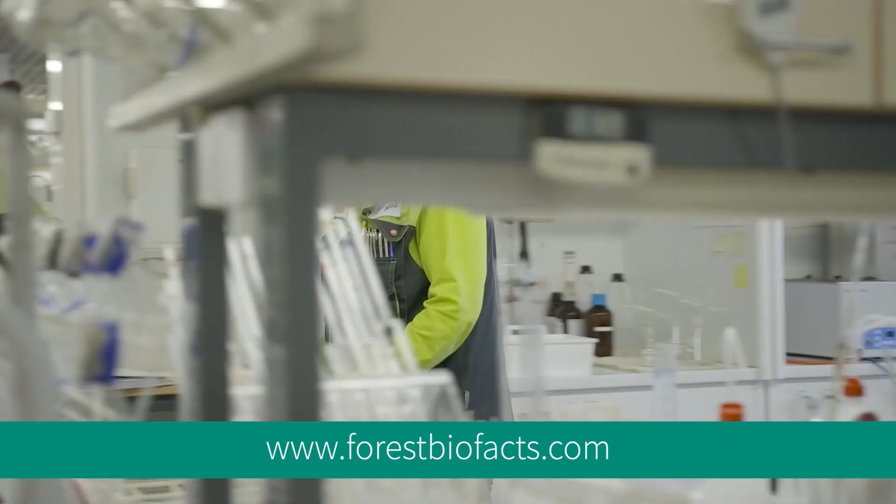The world is digitalizing at an accelerating pace, which creates a need for new learning methods. The forest industry has also experienced significant changes within the last decade. In addition to traditional pulp and paper manufacturing, many new forest-based products and end uses have emerged.

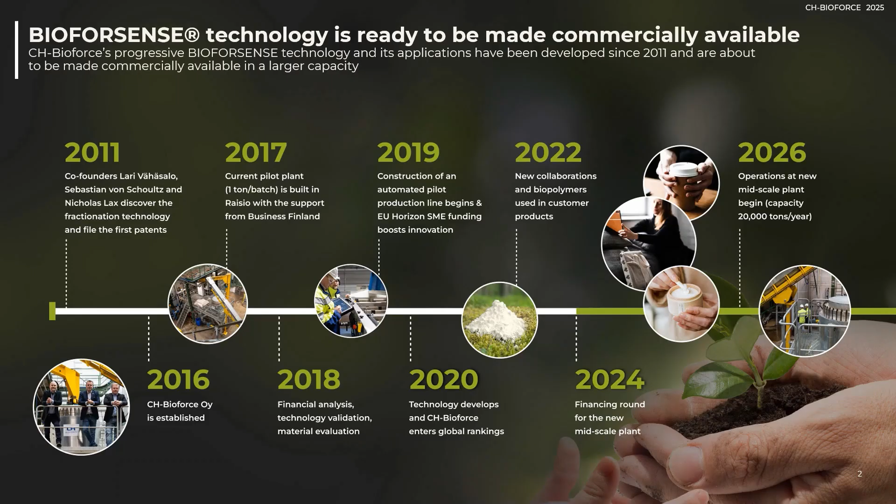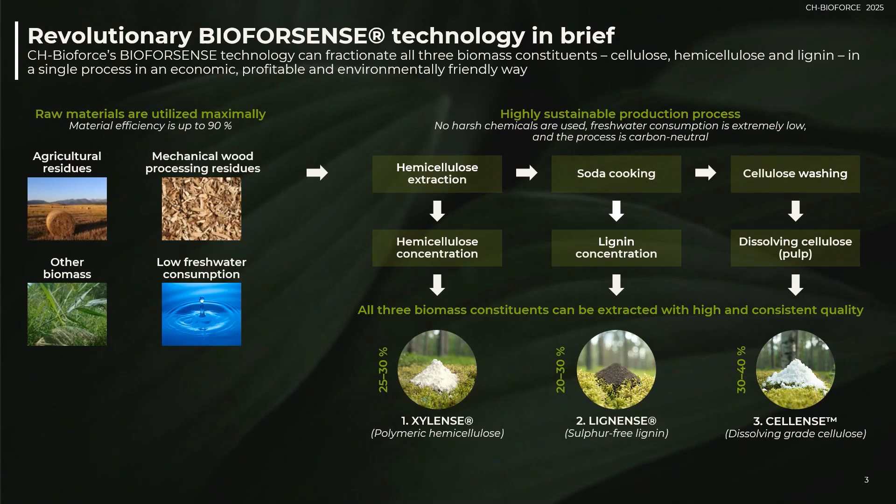What we do really is we extract the hemicelluloses in their polymeric and most natural form, and in pure form with only water. So this is pressurized hot water, which is in a sense not really inventive if you think about the decades before us, but the methodology in itself has quite many implications for the product quality. But what we are certainly most interested in is the sulfur-free lignin because of its highly efficient product qualities.

If we look at the lignin, we have actually deemed it a product name called LIGNENSE, a registered trademark. What we are interested in most applications is its true ability to give some added value for many products. It's a UV blocker, antioxidant, and antimicrobial agent, and especially in cosmetics and food packaging this has caused a lot of interest for shelf life applications.

However, when we go to coating and making barriers that contain lignin-containing properties and these effects that we want, we need to understand how LIGNENSE or our lignin affect the barrier formulations, and how they will apply in real life applications. This is really where we ended up combining our efforts with ACA Systems to look at how coating applications and formulations end up behaving in real life applications. Of course, lignin can also be turned into lignin resins like lignin phenol resins and other applications, but we are really looking at these special properties that we find in this sulfur-free lignin that we can produce.

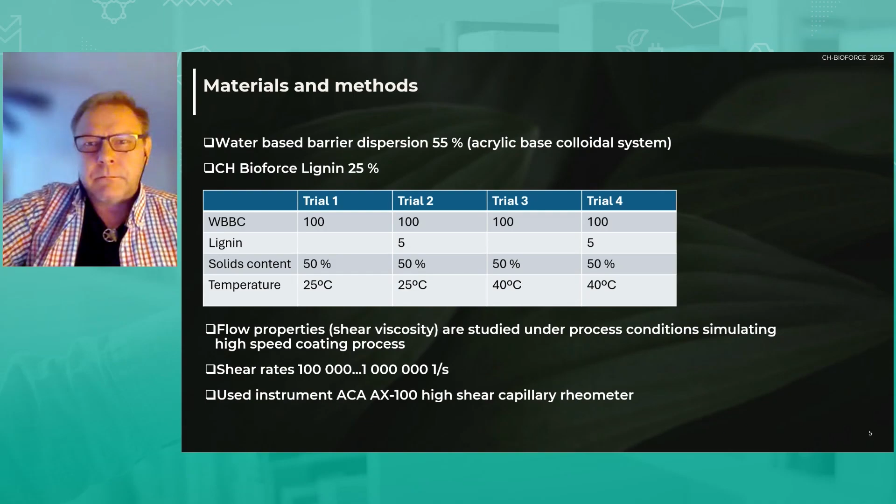We start with materials and methods, so we wanted to keep this very simple for having a short overview of what we have done. We had a water-based barrier dispersion as a base material. This was a commercial acrylic-based colloidal system. And then we used the CH Bioforce lignin, and we formulated 4 recipes.

We just added 5 parts of lignin to 100 parts of barrier, and made it up at 2 different temperatures just to check the temperature effect on viscosity properties, and solids content was kept constant. So basically, we just wanted to understand how this lignin will affect the water-based barrier dispersion.

When it comes to viscosity measurement, we wanted to understand process-related rheology and viscosity. This is where we are specialized. We are measuring different formulations in high shear conditions that are present in high-speed coating processes. So we want to simulate and create a similar kind of stress that you have in real processes, and use flow channels that are simulating the process effects.

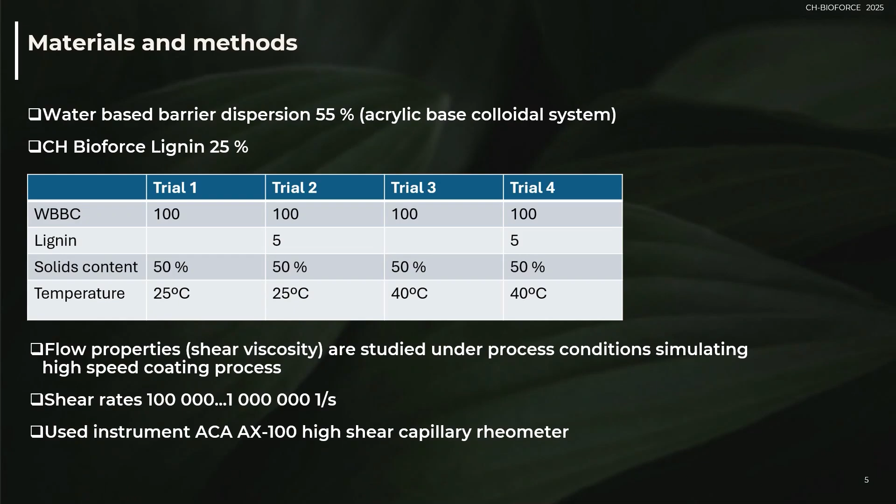And we used this instrument from ACA, AX-100 high shear capillary rheometer, and that's the basic setup for the trial.

A few words about the instrument. As I said, we are specialized in process rheology, and we try to understand behavior of different materials in process conditions. How we can do it? We have developed this new capillary viscometer or rheometer, and we are pressurizing the sample with the high pressure method up to 150 bars, and then we are forcing the liquid or coating color through a narrow capillary.

In high pressure measurements, we use a 0.5 by 50 millimeter capillary, and we can reach shear rates from 200,000 to 1 million roughly. This is very relevant for blade coating and film pre-metering. Those metering elements have a very narrow gap for coating color to flow at very high speed, so there we have extremely high shear rates, and this is responsible for coat weight control, for example. And we have a TAPPI method for that.

Then we can also measure low pressure. We reduce the pressure and use a little bit wider capillary, resulting in a shear rate range of 10,000 to 200,000 roughly. This is more relevant for sizing and film coating.

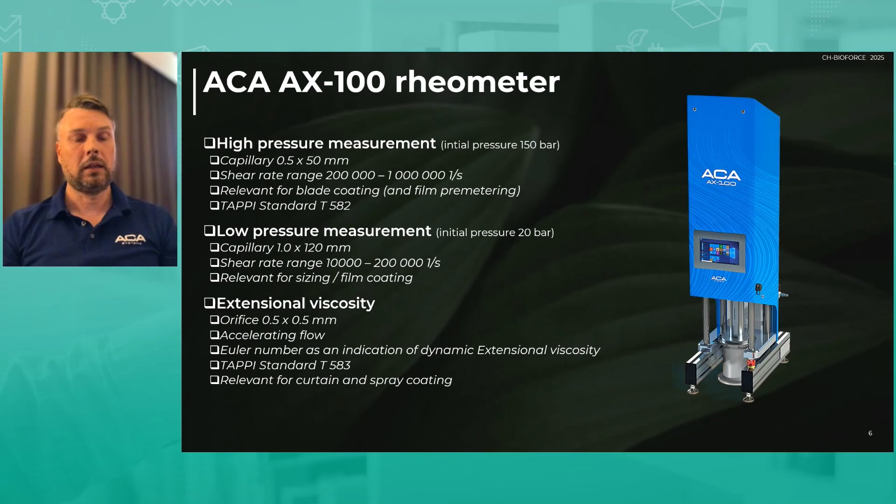And finally, we can also select the orifice method, which is nothing else than a very short capillary. With that geometry, we can create accelerating flow, and we can calculate dynamic extensional viscosity. This is also a TAPPI standard, and you can learn more about these methods from there. This is very relevant for curtain and spray coating, where you have accelerating flow in the process.

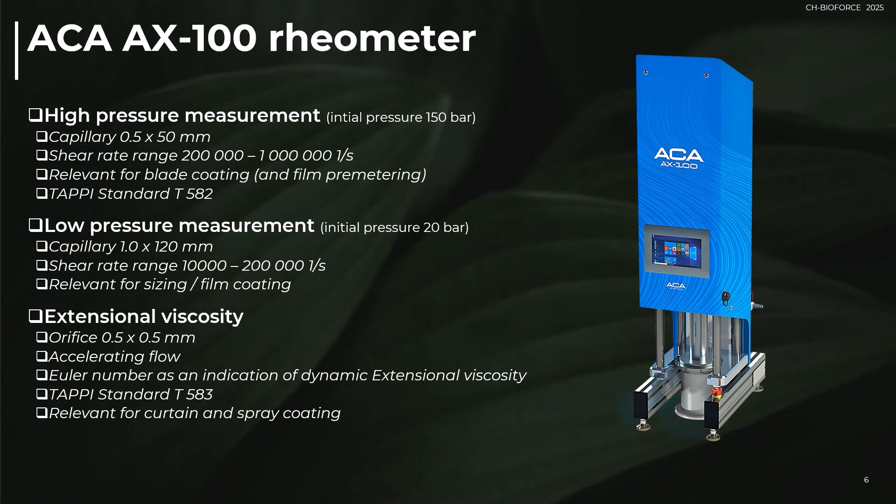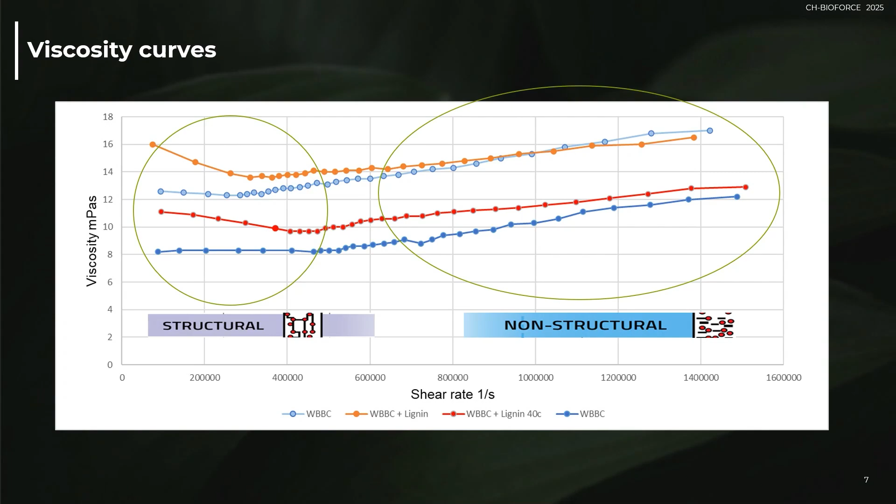Then in high shear area, we are destroying these kind of crystals or structures that are formed by lignin, and we are having a dilatant curve, meaning shear thickening curve. This is quite typical for colloidal systems where we have a very narrow particle size distribution, and this contributes a shear thickening behavior, which is not very optimal for runnability in high speed coating.

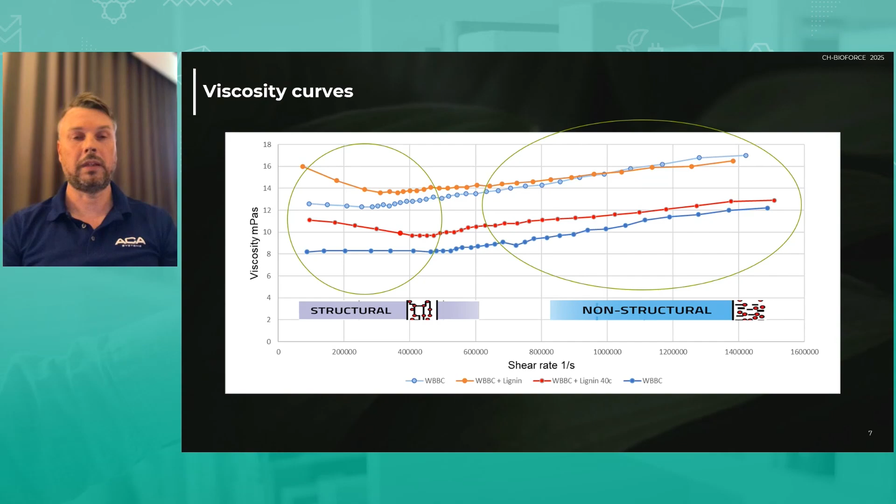But we see that actually lignin is reducing this dilatancy in high shear area. So it is affecting things in a way, first to have a higher viscosity in low or mid shear area, but then reducing the high shear viscosity.

And we are now entering into conclusions. We can say that at low shears, the lignin slightly increased the viscosity, and the viscosity curve is pseudoplastic, so shear thinning, and this is likely due to chemical interaction and structural network formation within the dispersion.

Whereas at high shear rates, the lignin reduced the dilatancy, indicating a kind of friction dampening effect between the colloidal particles. I think this is a very interesting finding, seeing such a dual effect, a combination of pseudoplasticity at low shear and reduced dilatancy at high shear.

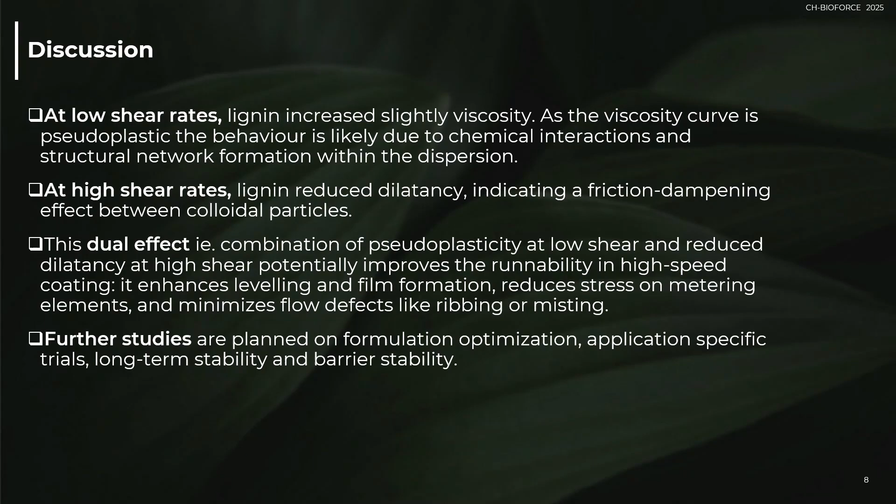It potentially improves the runnability in high-speed coating. Based on our experiences, it enhances the leveling and film formation if we have a shear thinning behavior at low and mid shear, but also when we have a reduced high shear viscosity, we reduce the stress on metering elements and minimize flow defects like ribbing and misting.

This in general is responsible for coat weight control and for barrier coating. It's quite important to control the coat weight properly to get good profiles and good film forming. Of course, there are a lot of studies to be done in the future, and we plan together with Bioforce to do more studies on formulation optimization, application-specific trials, and stability issues for long-term stability and barrier stability.

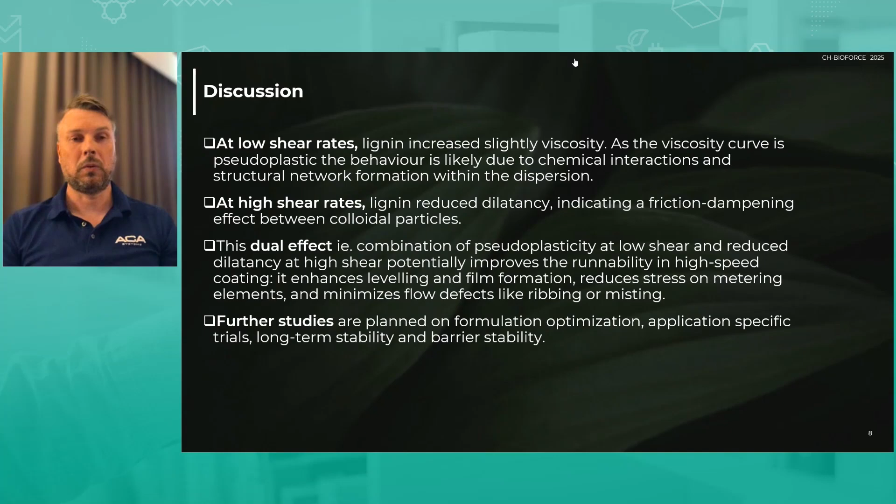But for this short study, we see already quite interesting effects of lignin as a coating additive, and with that I think we are ending this presentation and ready for your questions. Thank you.

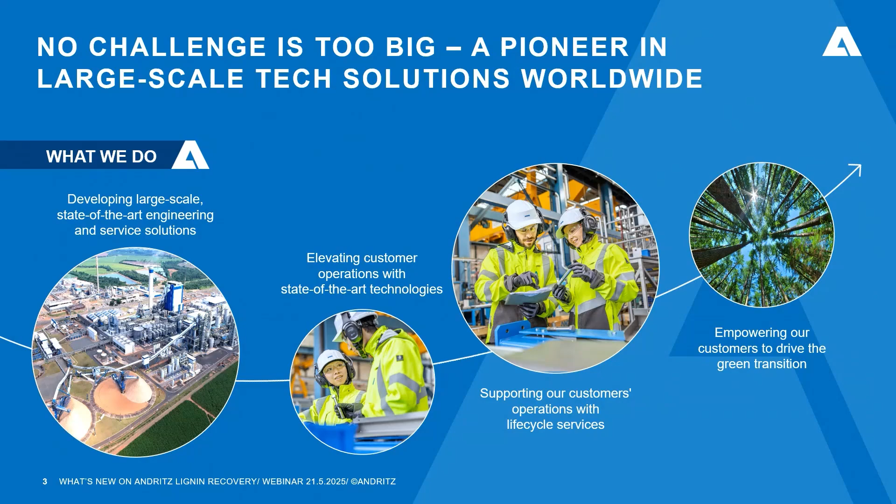Very shortly about Andritz: we are a multi-divisional company working globally in four different business areas: pulp and paper, metals, hydropower, and environment and energy. We develop large-scale, state-of-the-art engineering and service solutions, as well as technologies. We support our customers' operations with lifecycle services, and today more and more we are empowering our customers to drive the green transition with e-fuels, carbon capture, and hydrogen, for example.

For the last 10 years or more, on the pulp and paper side, we have been looking at how we can, together with our customers, unlock the hidden values in their side streams, accelerating green technology development and creating new revenue streams. This has been done by looking at how we can reduce consumption of water, energy, and chemicals at the pulp mills, how we can reuse side streams as new resources inside the mill - a good example being a sulfuric acid plant - and how we can refine side streams to create new value-added products, with biomethanol and lignin being good examples of that development.

When we go to the recovery area, where lignin is quite an important part, we have been providing new products to the market. One is our Kraftanol product, where we purify raw methanol to commercial quality biomethanol. Then our SulfoLoop product, where we produce commercial quality concentrated sulfuric acid out of CNCG. Today, under SulfoLoop, we also have other means of helping to solve the sodium-sulfur balance.

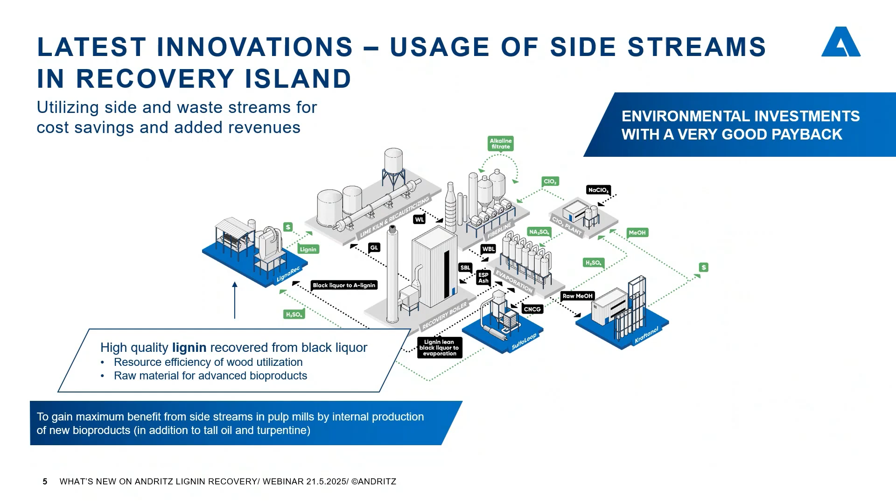And last but not least is of course our lignin recovery product. The driver for lignin, as I see it, is mainly the resource efficiency of wood - how we can take more out of the wood coming in, not burning it, but making new advanced bioproducts, mainly those which can replace fossil materials to reduce the carbon footprint or lack of resources.

At Andritz, under lignin recovery, we have two products. LignaRec is what we call a purified or standard lignin product, where lignin is first recovered from the black liquor, and then in the second stage it is purified with acid washing. The end product is a bulk raw material, which is then further refined for different applications. This is a technology we are also providing to the Södra Cell Mönsterås project.

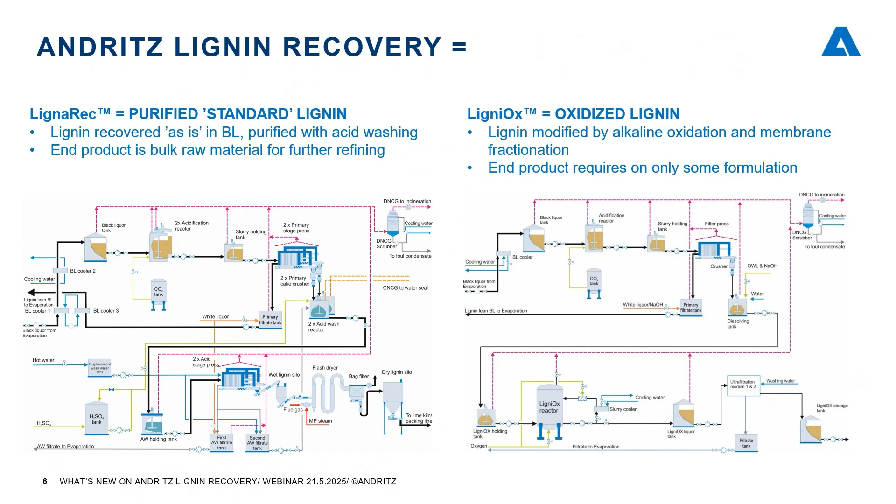LigniOx is an alkali oxidation process for lignin solubilization. LigniOx was actually invented by VTT, the Governmental Research Centre of Finland, and the process was further developed in an EU LigniOx project by a consortium of biorefineries, technology providers, chemical industry players, and research institutes like VTT. VTT is the patent owner for the application use, and there's a shared patent for integration of the LigniOx process into the kraft pulp mill, held by Metsä, Andritz, and VTT.

The process is slightly different. It has precipitation of lignin with the help of CO2, same as in the traditional standard LignaRec process. But then we have oxidation and membrane filtration processes afterwards, and the final concentrate is ready for end-use applications, or only some small formulation is needed. The concentrate can be dried if needed, for easier transportation.

After the EU project, Metsä, together with Andritz and Dow Industries, continued development. Last year, Metsä made an investment decision for a demo plant for LigniOx, and the demo plant is now actually in the construction phase, and will be started up at the end of this year. Andritz is a technology provider for that demo plant.

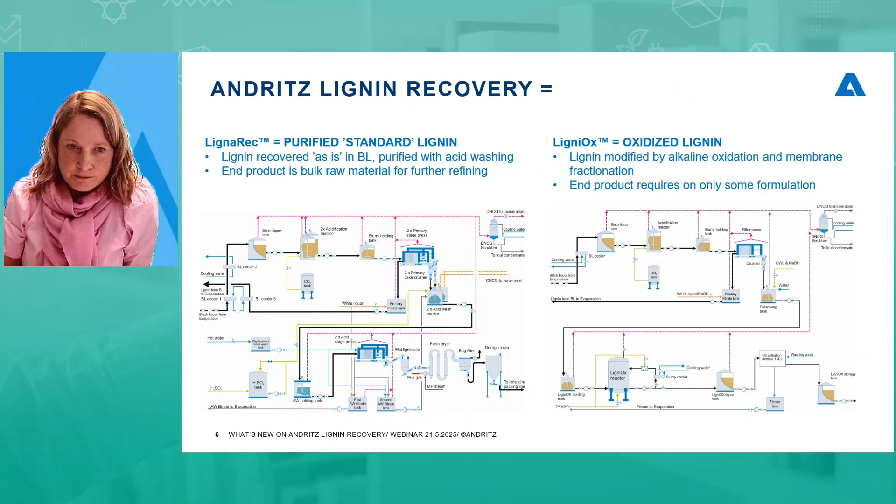A couple of words about lignin products: the development on the product side has been quite intensive, with a lot of different product possibilities, and I think the development is still ongoing. There are already some applications on the market, like phenolic resins, but maybe the lack of production of lignin has been hindering the development further, and we are very happy that the Södra plant will be delivering rather big amounts of material to the markets.

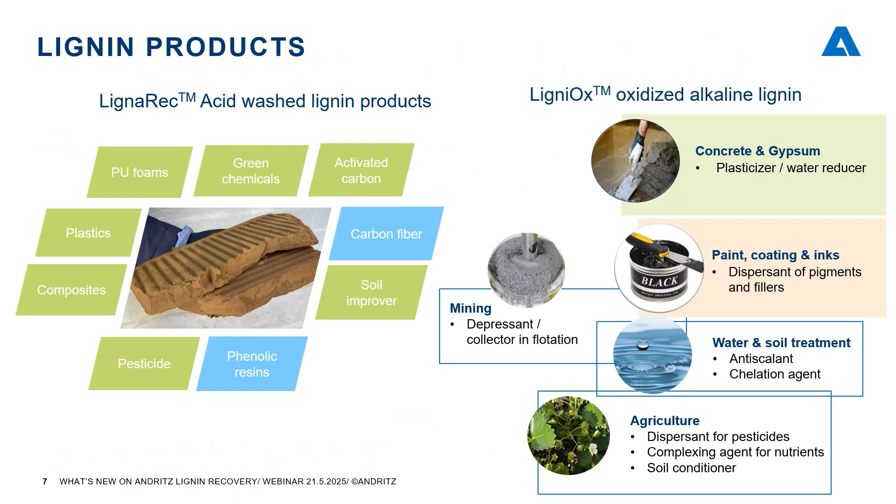LigniOx, the oxidized alkaline lignin, has somewhat different applications. In the EU project, the LigniOx product was tested in concrete and gypsum as a plasticizer, with very good results.

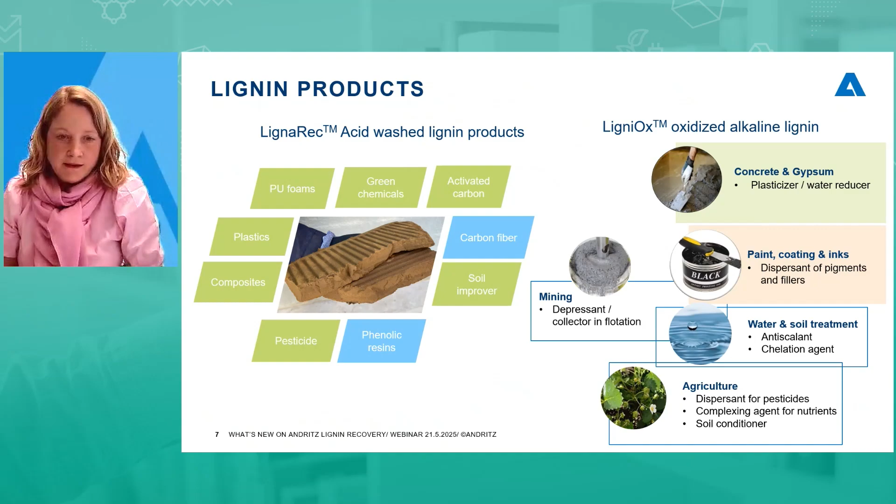Shortly about the process itself, the LignaRec process: we are removing black liquor from the evaporation plant, and we have a precipitation of lignin with the help of CO2. Then the precipitated lignin is recovered in a filter press, where the cake is further dispersed in an acidic filtrate, and the pH is dropped with the help of sulfuric acid.

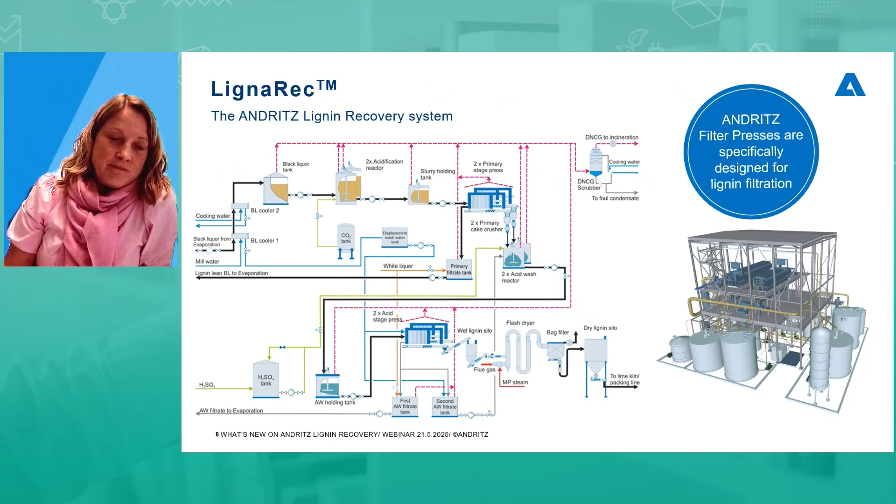The lean black liquor from the filter press is fed back to the evaporation plant. The acidified slurry is then filtered and washed so that we can remove impurities like sodium, and the material can be dried. In most cases it is easier to transport when it is dried, and there we have a flash dryer technology, and then the lignin can be further modified or densified, or whatever is the needed way for the customer.

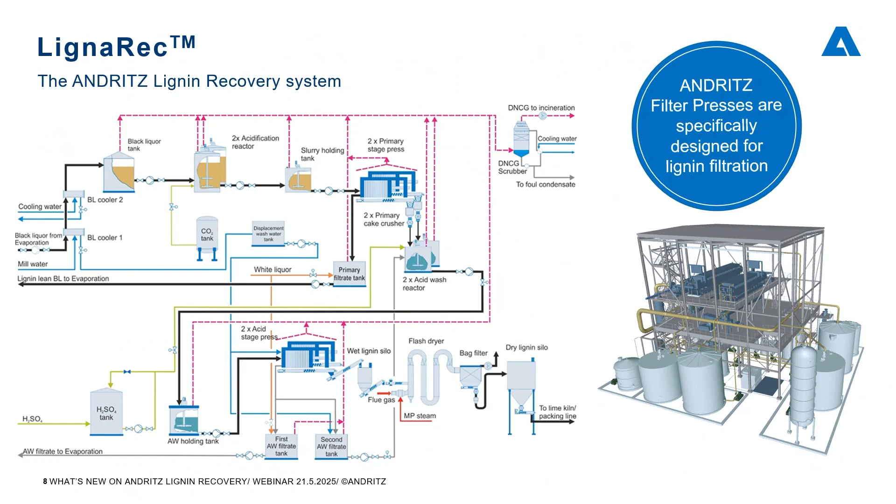The main component of the LignaRec process is the filter presses. We have our own filter press technology in Andritz, and a lot of references from different industries and different applications, but now also for lignin. When we are talking about lignin recovery, it's of course what I just showed you, filter press technology, and then we have a dryer. In most cases, because of the rather high explosive characteristics of the kraft acidic lignin, acid purified lignin, some kind of densification method is good for helping to transport it safely.

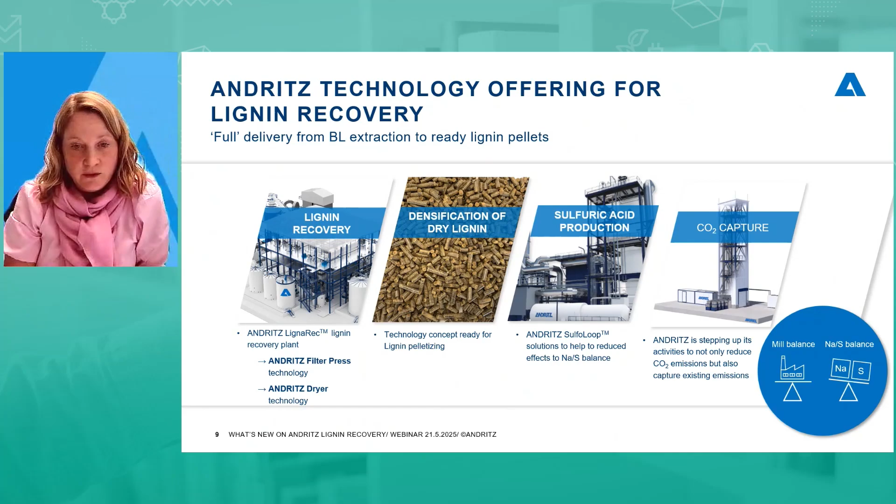As mentioned, we are utilizing sulfuric acid in the process for removing the sodium. So in most cases, when we are talking about lignin recovery, we also consider SulfoLoop solutions to help reduce the effects on the sodium and sulfur balance of the mill. And CO2 capture is today more and more important. We have our own CO2 technologies, amine scrubber and membrane technologies, today very often discussed when talking about lignin recovery. We can extract the CO2 from the lime kiln or recovery boiler flue gases and utilize that in lignin recovery, which would be quite an interesting way.

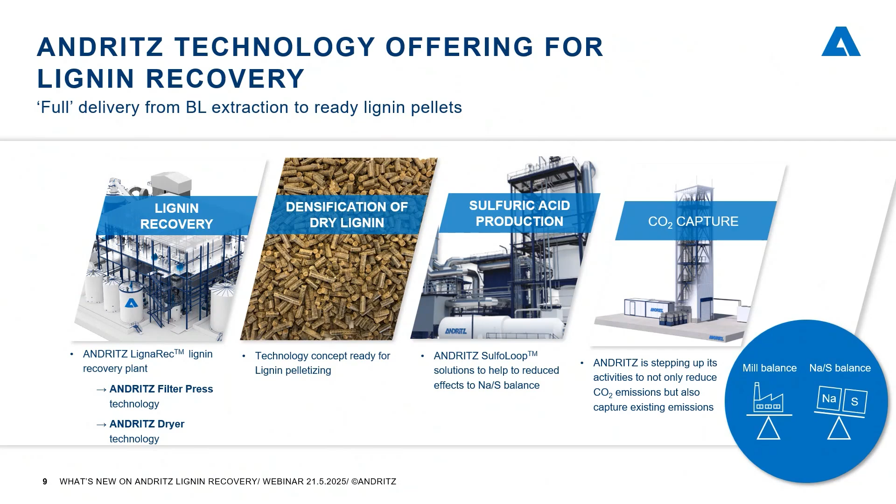When talking about integrating lignin, mill balance effects to the evaporator and recovery boiler of course need to be investigated, as well as sodium sulfur balance. LigniDry is our lignin drying technology, a flash drying technology. Again, very much used already in the industry, but now also utilized for lignin applications.

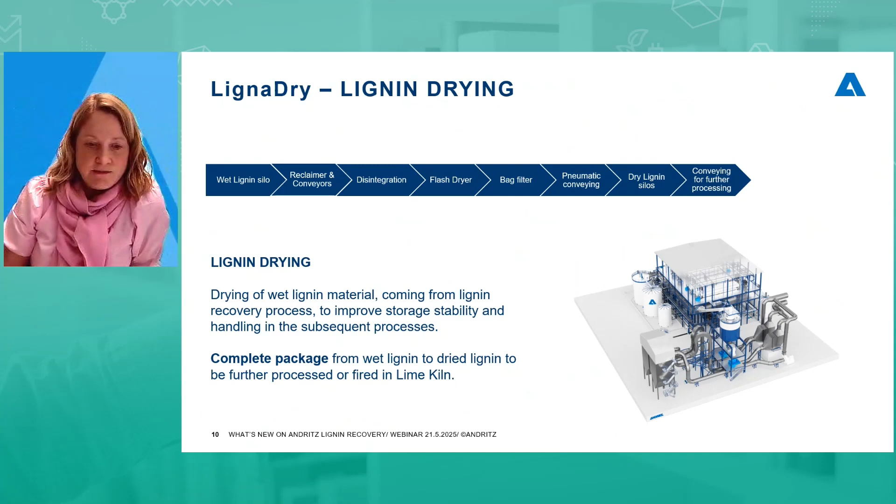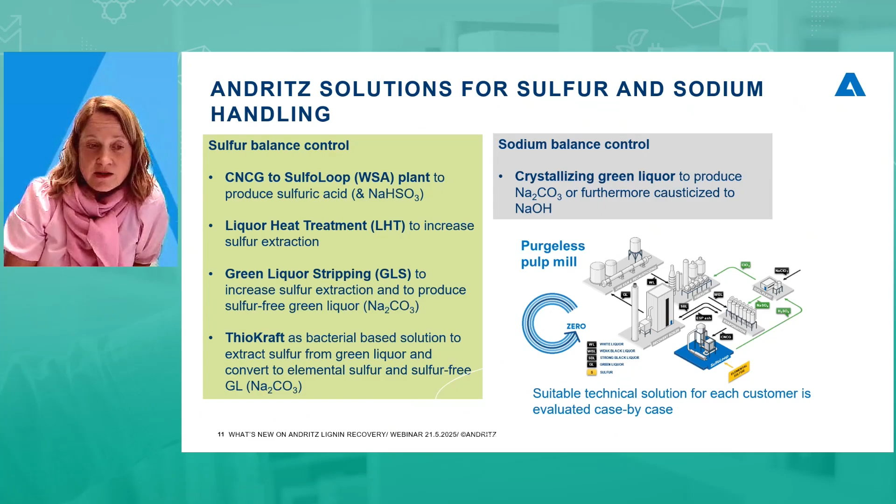For sulfur and sodium handling, for the sulfur balance control, there are different means. The WSA plant, which will also be installed in Södra Cell Mönsterås, is one way, and maybe the most common way, so that we take out the CNCGs of the mill and produce high concentrated sulfuric acid. And then we have different means like liquor heat treatment and green liquor stripping to increase the sulfur extraction if needed. And lately also ThioKraft, a bacterial-based solution, has come into the product portfolio. There are also means to help with sodium balance control, but suitable technical solutions for each customer need to be evaluated case by case.

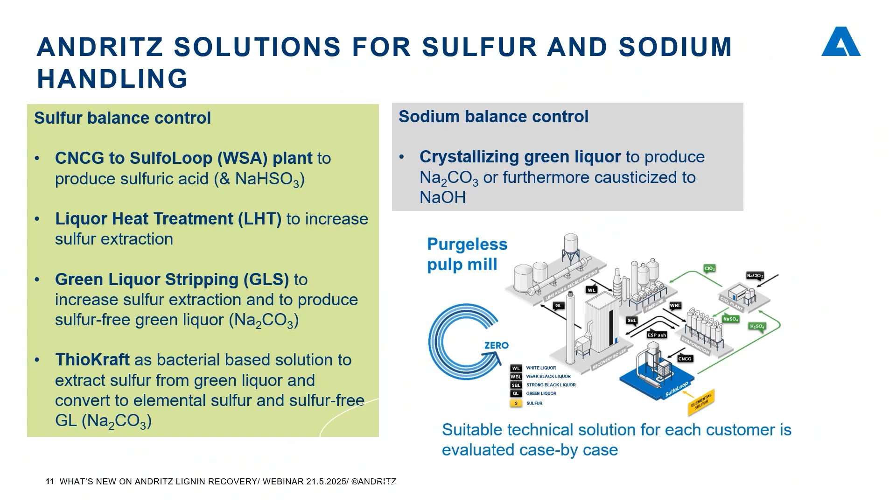Then going to the latest references, we were very happy last year. We were awarded 2 projects for lignin. First, we were awarded in April the demonstration plant for LigniOx, as discussed, and it will be built at the Metsä Fibre Äänekoski mill. Startup of that project will be the end of this year. And then the big one is the Andritz LignoRec lignin plant for Södra Cell Mönsterås. In the same project, we are also providing the SulfoLoop sulfuric acid plant and some other smaller process areas. We are very happy about that. The engineering is well ahead, and startup will be 2027.

For SulfoLoop, we also have a couple of sulfuric acid plants already in operation, one in Klabin Ortigueira and one in Suzano's mill in Brazil. The Metsä Äänekoski demo plant is a 2 tons dry solids per day plant and uses softwood and hardwood, and the end uses will be biodispersants, plasticizers, or various end uses.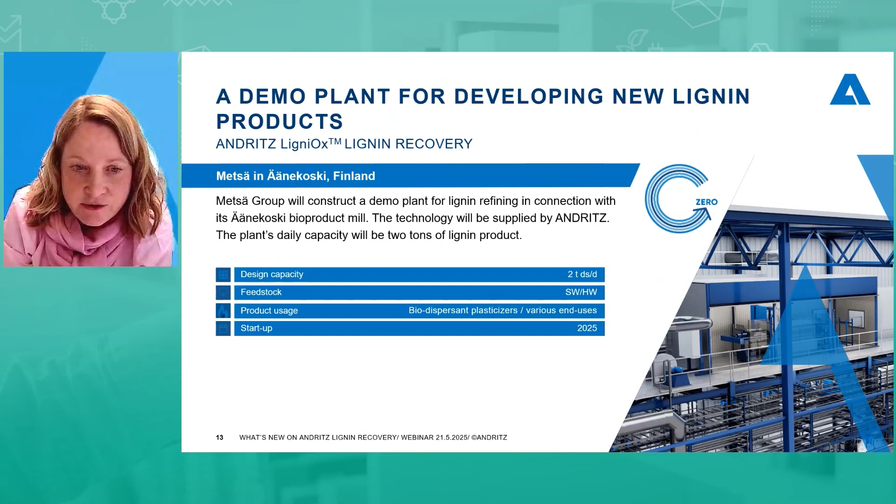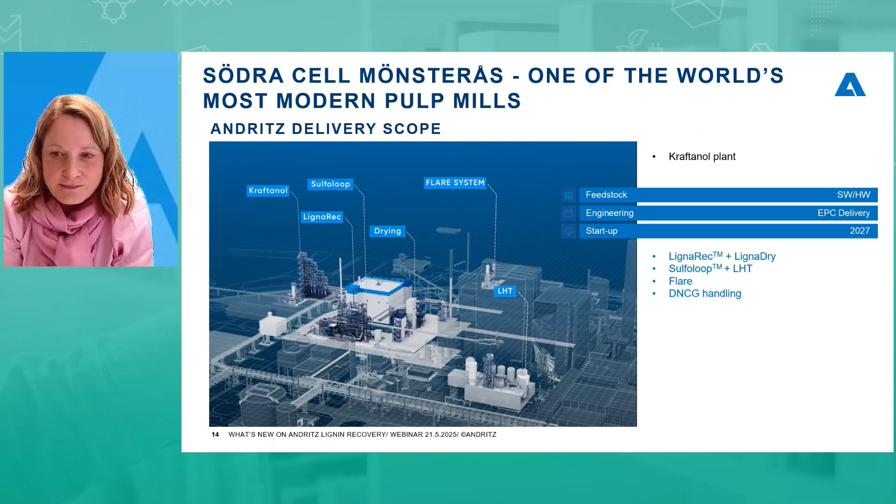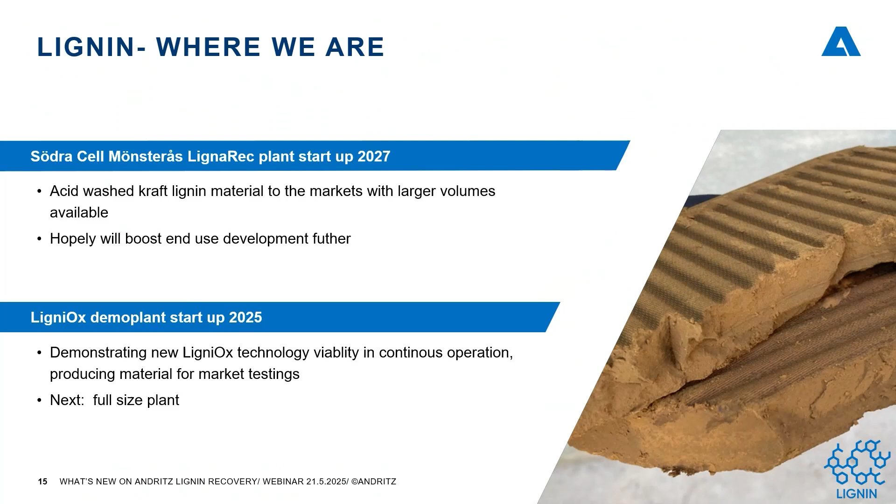LigniOx demo plant startup is at the end of 2025, and it will be demonstrating the LigniOx technology viability in continuous operation, producing material for the market testing. And of course, we are also waiting for the full size plant for Ligniox technology to come. With the investments now done, we see the future bright for lignin. Thank you very much.

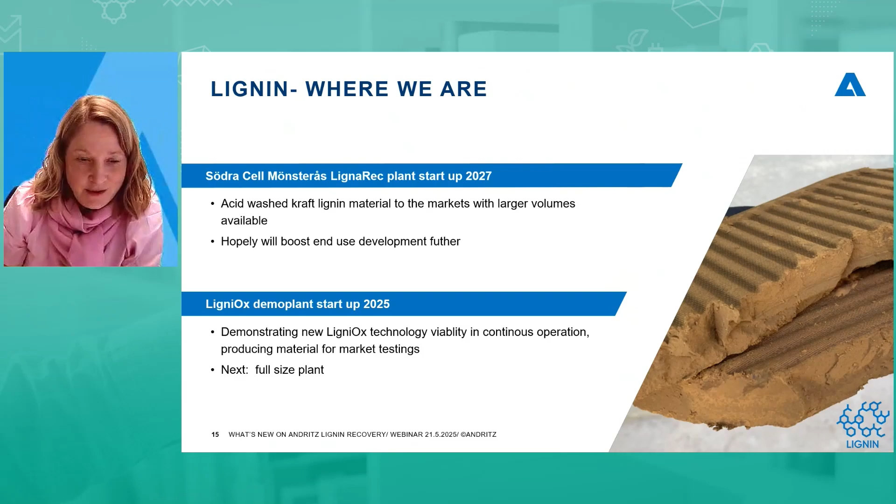Excellent. It's quite exciting, Elina. I like what you said about unlocking the hidden value in our products, and you've certainly offered many options and paths forward for that. Let's start with one of our earlier questions. What percentage of lignin removal is allowable before it begins to significantly impact the electricity generation system of a kraft pulp mill?

Well, I think it is very much dependent on the mill. What is mostly done is to look first on the recovery boiler side, how it affects the recovery boiler operation, and that is mostly defining the maximum capacity. Electricity needs to be evaluated case by case. It's so much dependent on the mill.

Yeah, that makes sense. A practical question: is there any solution to reducing the smell of the standard lignin? Well, yeah, there are. There are developments ongoing, let's say so. All right, then. What do you see as the biggest challenge or risk to add lignin recovery to a kraft pulp mill?

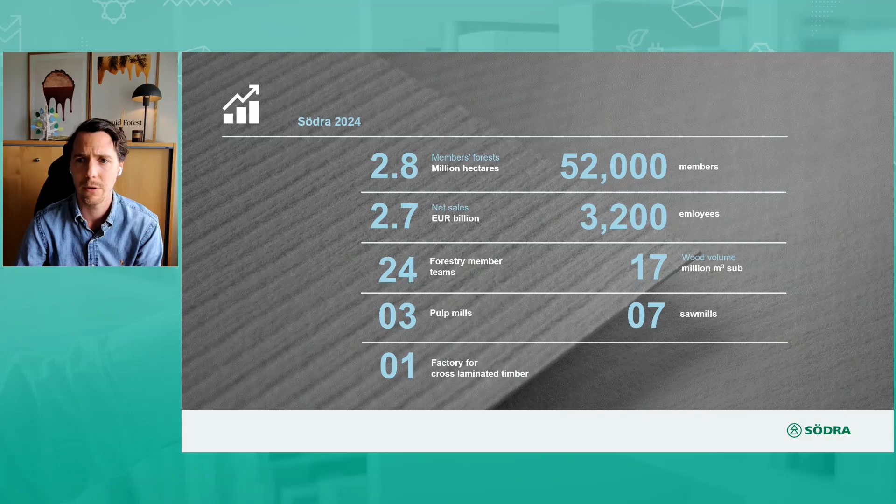And 7 sawmills, 6 here in Sweden and 1 in Finland. A couple of years ago, we also invested in a plant on the west coast for cross-laminated timber, so we also have that in our portfolio. Today, a bit more than 50,000 members. For those who can see Sweden in front of you, if you draw a line from Stockholm to Oslo, Norway, every second tree south of that line belongs to our members. Södra owns some small forest, but the majority is owned by our members, and they are actually not obligated to deliver the raw material to us. But our offer should be the best, so the forest should come into our industries.

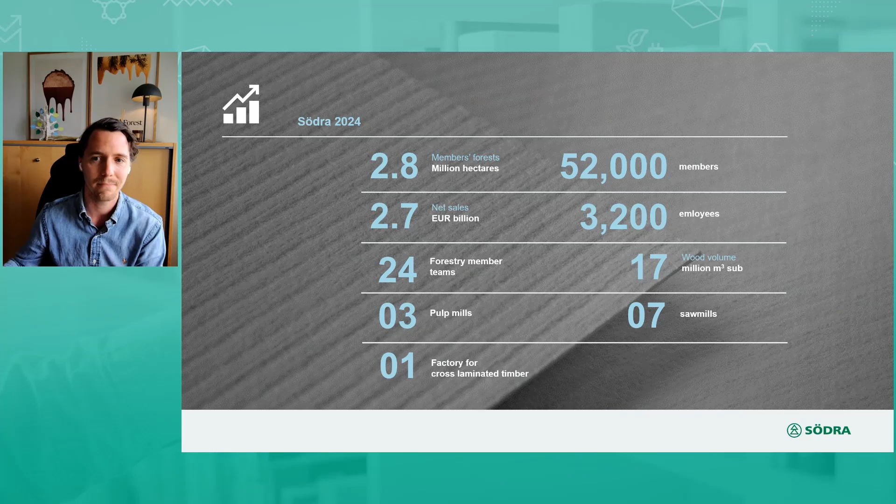So this is the products we produce. Paper pulp, we are one of the big actors globally, also on wood products. So we are super big. We also have some production of seedlings that we sell to members, but also externally. And at one pulp mill, we also produce dissolving pulp, which goes into the textile value chain for viscose or lyocell production, but also a lot of other applications. So this has really been the core, and I think a good recipe for Södra historically to grow in those areas.

But during the last 5 years, there's been a change in the raw material situation, because if you grow in those areas, you need more trees. Many years ago, there was an oversupply of raw materials, quite easy to grow by that. But a couple of years ago, and especially since the war, there's been a structural change. So we see it as super important to make more of every tree. So we also produce biochemicals like crude tall oil, turpentine, and our biomethanol that was mentioned before. A lot of different biofuels, like the bark we produce in our industries and sell. Biomethanol can also be included there. Biomaterials could be our sawdust, for example, going into different applications, cutter shavings. So many different things there.

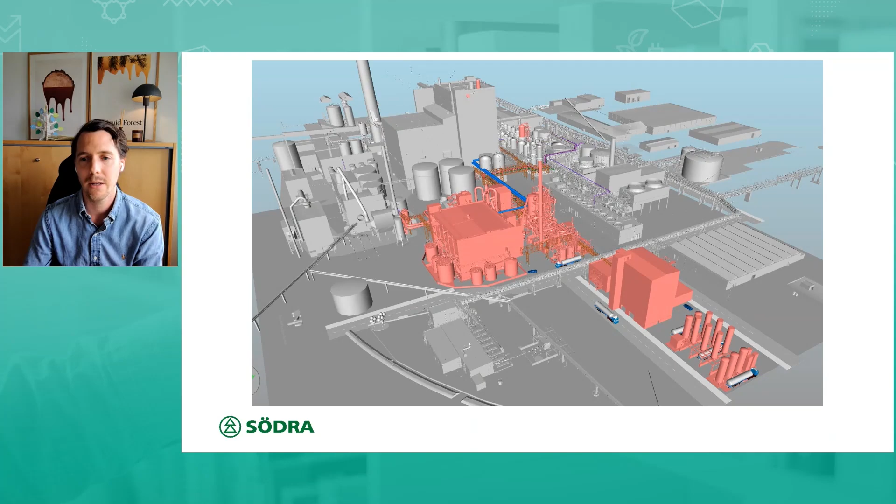And in this particular case, like mentioned before, you need a huge surplus of energy, because if you take out lignin, you still want to run the pulp mill and the recovery boiler. But in this case, we can take out this amount of lignin without buying any energy externally. We are still self-sufficient on energy.

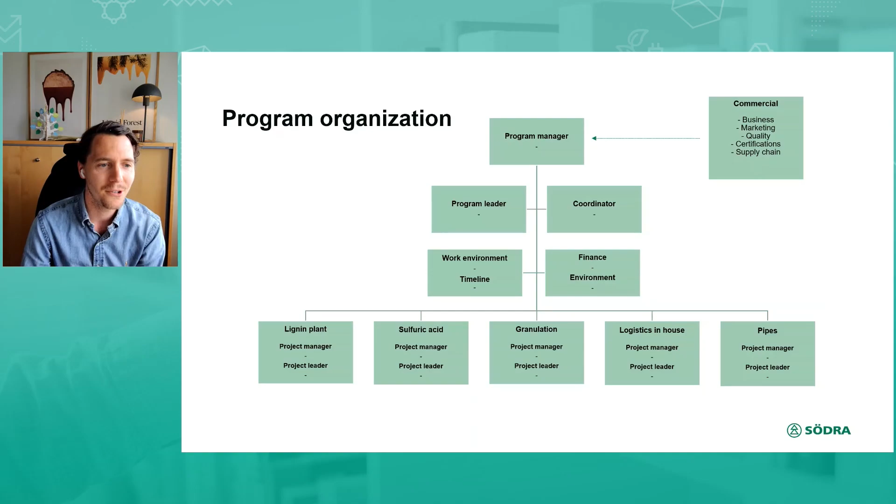So it's a big program, as we call it, because all of those, in the bottom here, you can see lignin extraction. That is a huge project itself. Sulfuric acid, a big project. Granulation, the same. So this lignin program contains a lot of different big projects.

So to be able to coordinate it in a good way, we call it a program, because this is also a new product for Södra, which means you also need to include the commercial aspects of this, of course, to be able to sell a product that is appreciated by the market. So this is our way of handling it, and then of course through a lot of different steering groups.

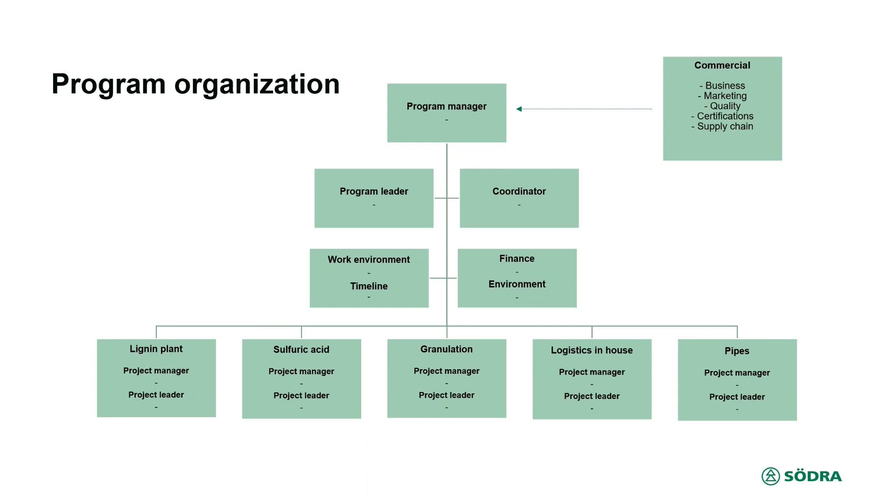So what we do is that we go from the black liquor to this wet cake, dry it up to a powder, and then compact it into those granules that you can see on the picture there. And I cannot disclose the specific properties of our product, but more talking from a general perspective, because Södra as a company, normally we act quite much as a raw material supplier.

If you take the pulp, for example, we do not have any integrated paper machines. We produce the pulp and sell it to someone who uses it as it is, or valorizes it in different ways, and quite the same on the lignin. We will produce a standard kraft lignin and sell it to someone who uses it as it is, or valorizes it in different ways. So that's what we will do with this plant.

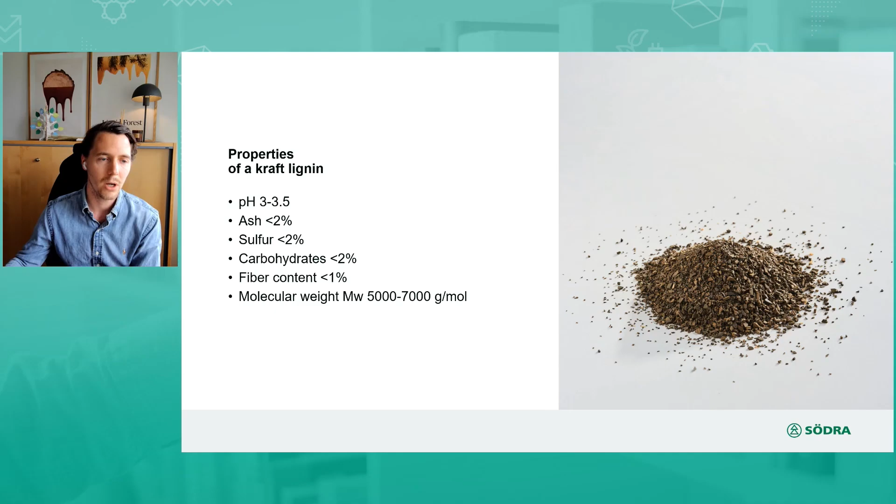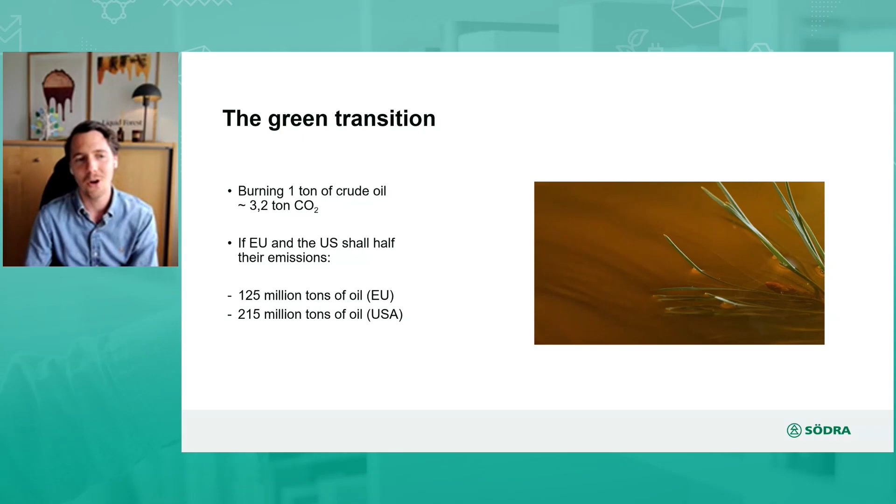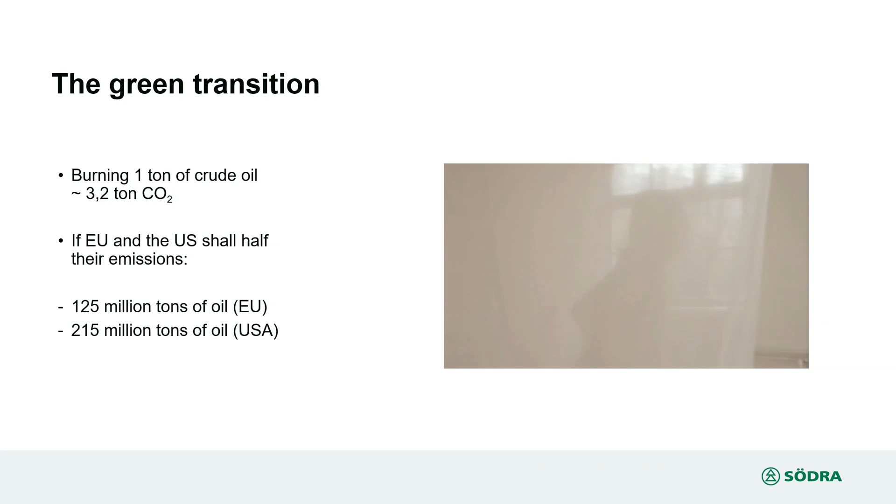And what is really driving this kind of investment, talked a little bit about it before, is of course the green transition. If you just make some quick calculations regarding crude oil, how much carbon dioxide you release to the air with 1 ton of that, and also look into the EU and US and all the targets that we have, if we should halve our emissions, you need to substitute a lot of crude oil. So of course the market can be huge.

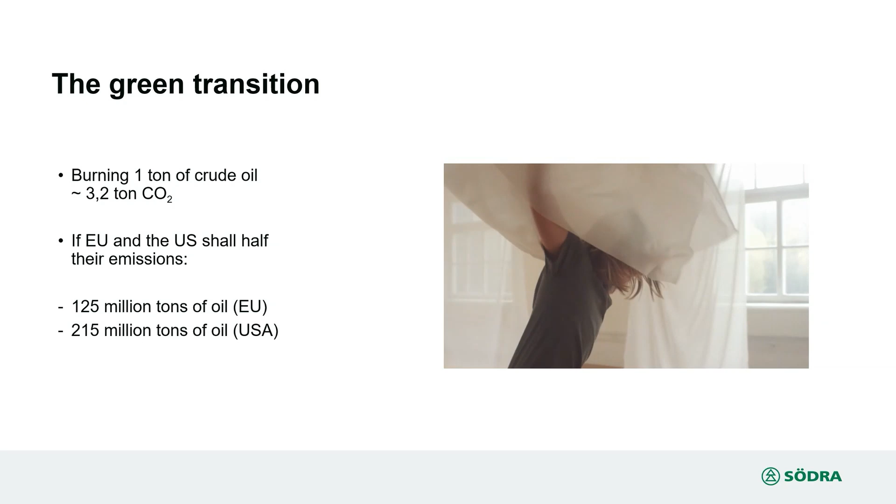So this is also driving this, and of course the whole value chains, the brands that connect to science-based targets, for example. There needs to be a solution to be able to make this transition, and we ourselves should halve our emissions until 2030, being net zero 2040, and many other companies and brands have the same. So this is one way to solve that in different value chains.

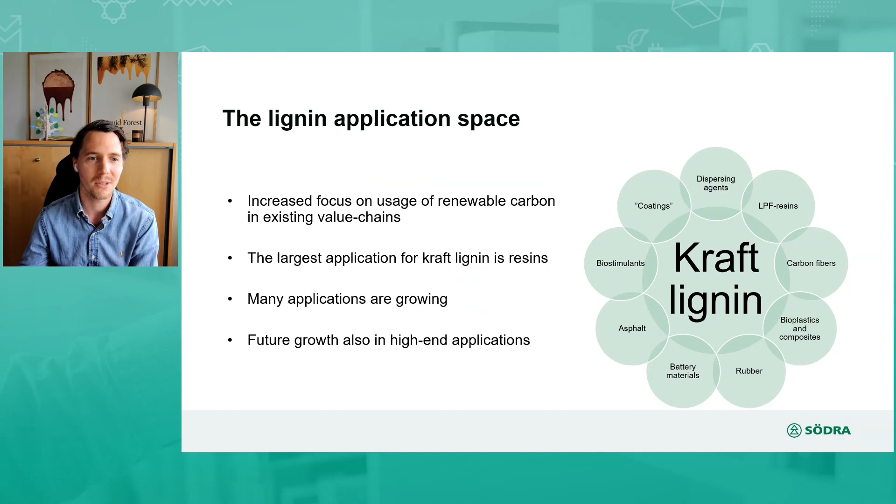But we can also see that asphalt, roofing, biostimulants, rubber, the plastic sector, there will be big markets in the future. So yeah, the project is going very well. Q2 2027 is the startup, so we really look forward to starting up this huge plant. Thank you. I think that was everything.

Excellent. You say 1,000 products from a single tree. Well, I can tell that Södra is quite excited about the potential of lignin markets. Victor, thank you for that presentation.

So that leads me to a question that an attendee has asked, and that is, what lignin end-use applications are most interesting to you and have the best potential, in your opinion, to become a large-scale business? Yeah. I would say we did not really choose in that way. Of course, you need to understand the properties of your own lignin, because depending on what technology and raw material you have, you get different properties of the lignin.

So for our case, there are different applications that are really of interest. And of course, if you can find those value chains where the lignin can also make a technical advantage towards the thing that it substitutes, then it's super. Then you have a lot of things. Technical properties get better. You have the carbon footprint. So finding those applications is what you want to do. Yeah, that multiple benefit. Yeah.

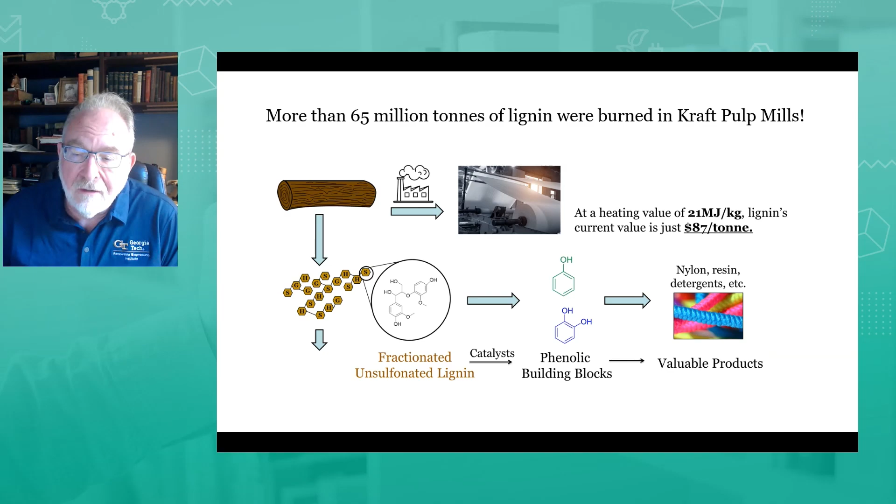Let me see here. So some candidates for biorefining of lignin. Certainly, we burn a lot of it right now for various uses of steam. 65 million tons is currently burned. But we think that there are some other options in the future for using lignin. And the biggest question is, what are the value categories that could be used if we could effectively and economically break down the lignin molecule instead of using it in its bulk form, such as in resins, which is an economic way to do things, but actually create more value.

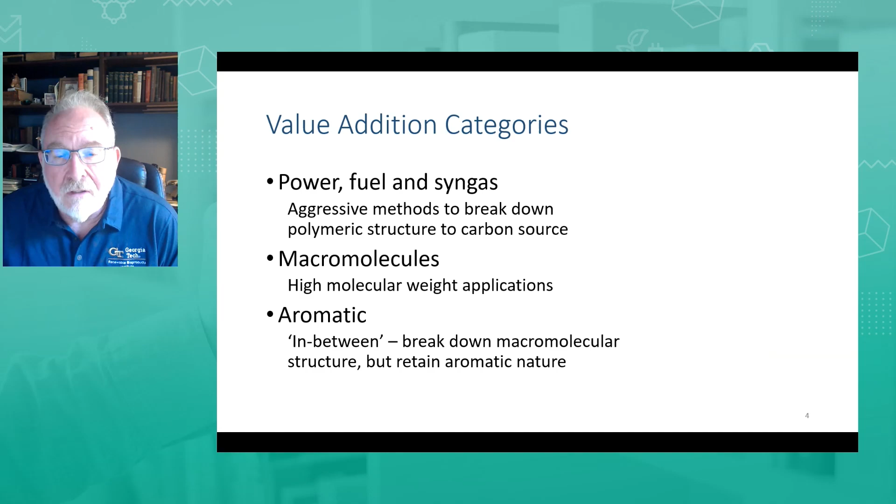The biggest challenge, of course, is that it's a very complex aromatic structure, has a high degree of variability depending on its source and species of wood, and it's a very reactive material.

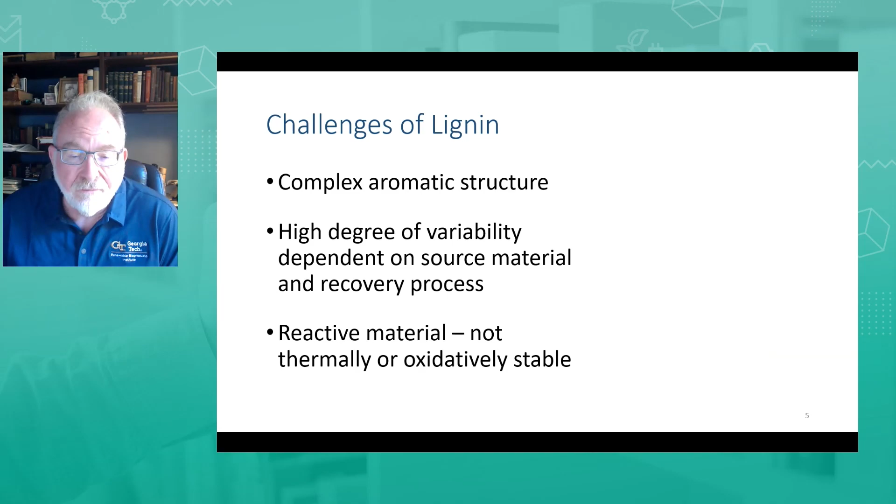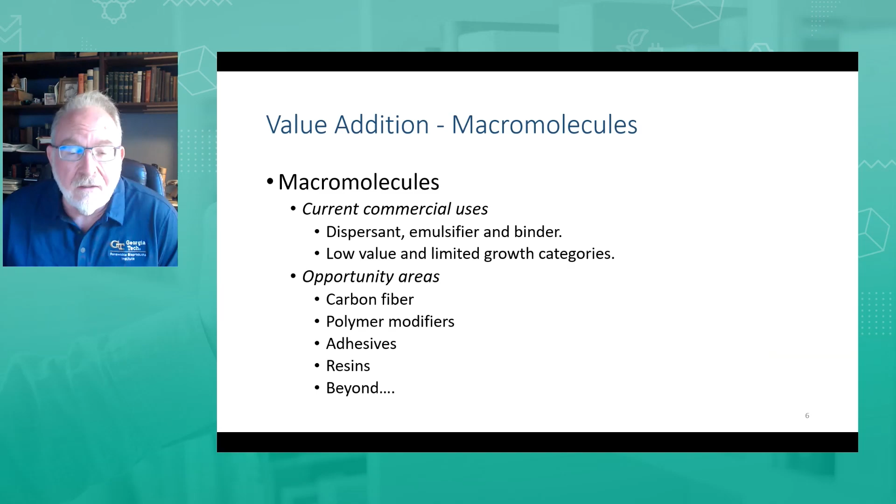For the macromolecule, current commercial applications we've talked about today include dispersants, emulsifiers, binders. These tend to be very low value and limited growth categories for most markets, but opportunity areas such as carbon fiber, polymer modifiers, adhesives, resins, and even beyond exist. We'll talk a little about some of the current research going on in that area.

This is some work by Dr. Satish Kumar in our School of Material Science around replacing PAN as a precursor for carbon fiber synthesis. This is his published work in a number of peer-reviewed articles on melt spinning followed by pyrolysis to make carbon fiber.

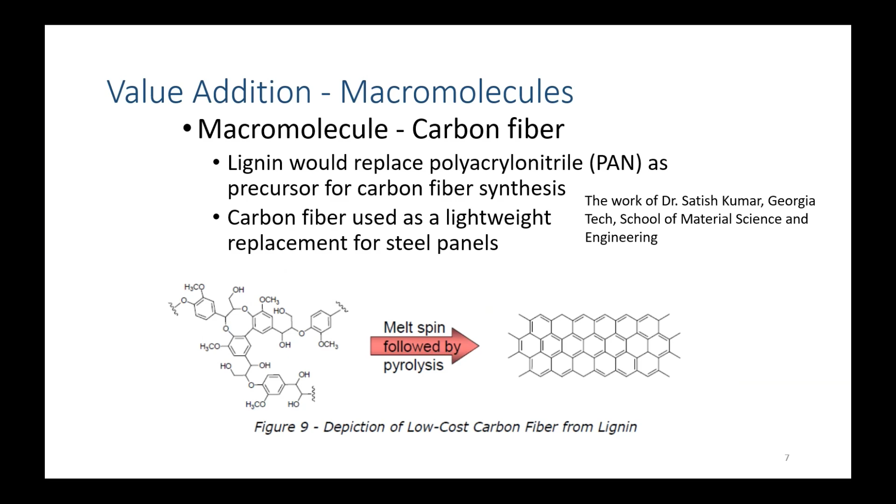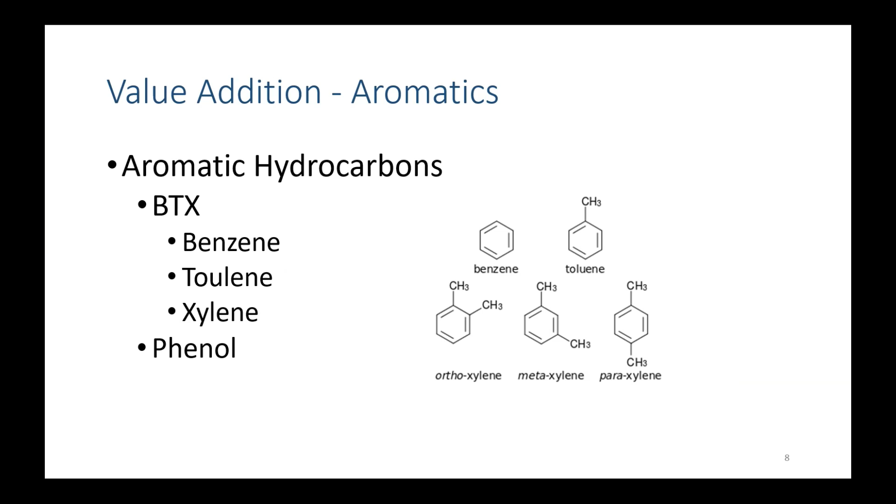But that is the biggest challenge, correct?

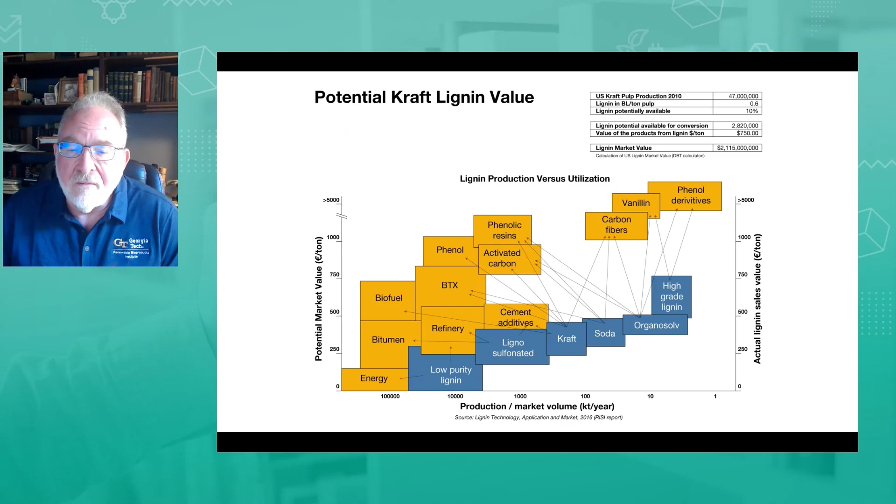If you think about these kinds of things we could make—polystyrene, nylon—there are some faculty working in this area in the US, and I'm sure around the world, on trying to get value-added chemicals from the lignin molecule. This is from the 2016 RISI report, which describes the potential market volume of various forms of lignin going into a potential market, all the way to phenol derivatives, vanillin—some people making synthetic vanillin—and carbon fibers. The highest market volume production would be around energy; this is actually shown from left to right, highest to lowest.

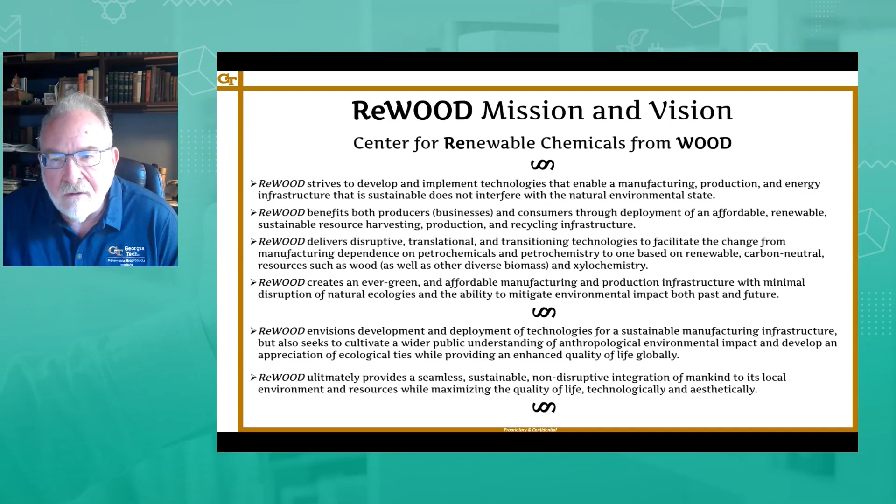I want to talk a little about a center, an engineering and research center we formed at Georgia Tech called ReWOOD. I don't want to go through the entire mission here, but this is a center for renewable chemicals from wood. Our mission is really looking at waste products like the lignin molecule, but also waste wood, and forming value-added products from those waste materials.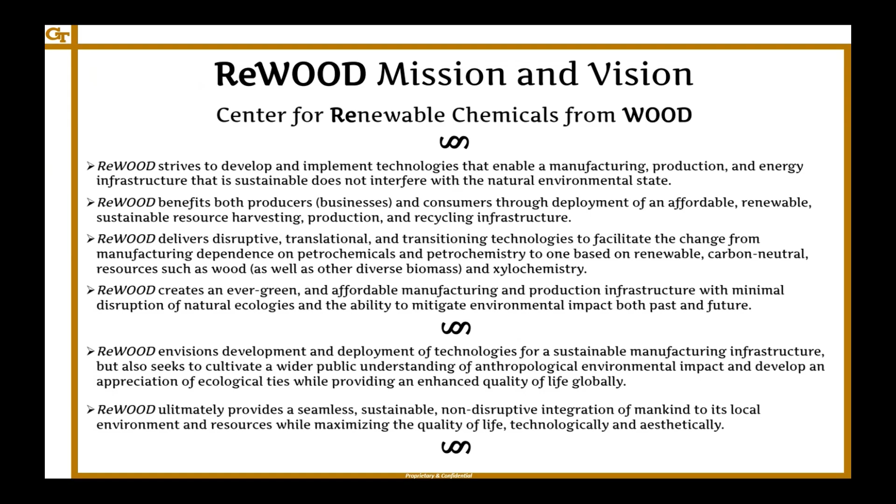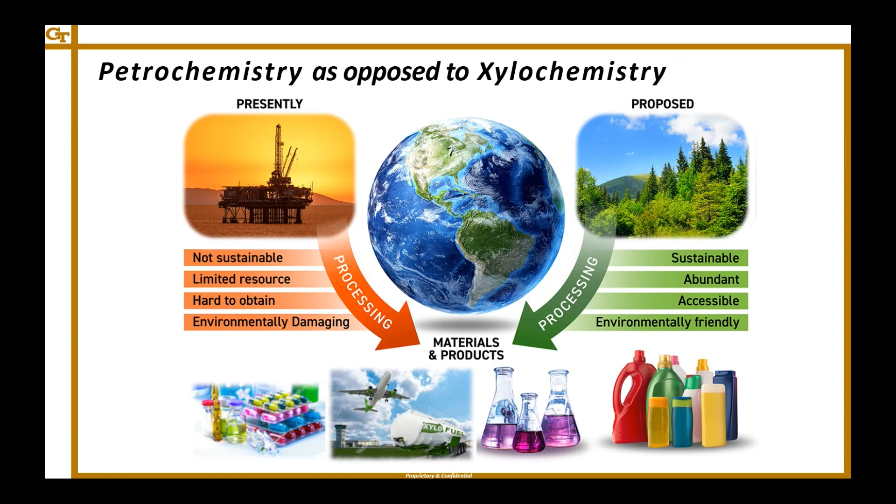If you look at petrochemistry as opposed to what we've referred to as xylochemistry—replacing petrochemicals in a number of applications—it's much more sustainable and abundant. We often talk about the most prevalent polymer on the face of the earth being cellulose, and the second most being lignin. We have a lot to potentially make from it.

This xylochemistry is really all about taking wood as a raw material and looking conceptually at an approach to a sustainable chemical economy. It's a well-suited, valuable basic chemical for utilization in a number of different applications. We'll talk a little about pharmaceuticals in particular, but also some work in fuels.

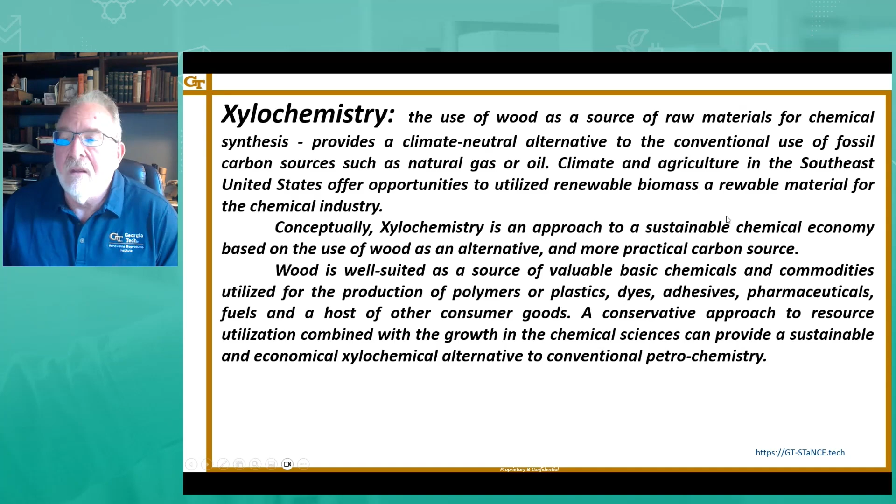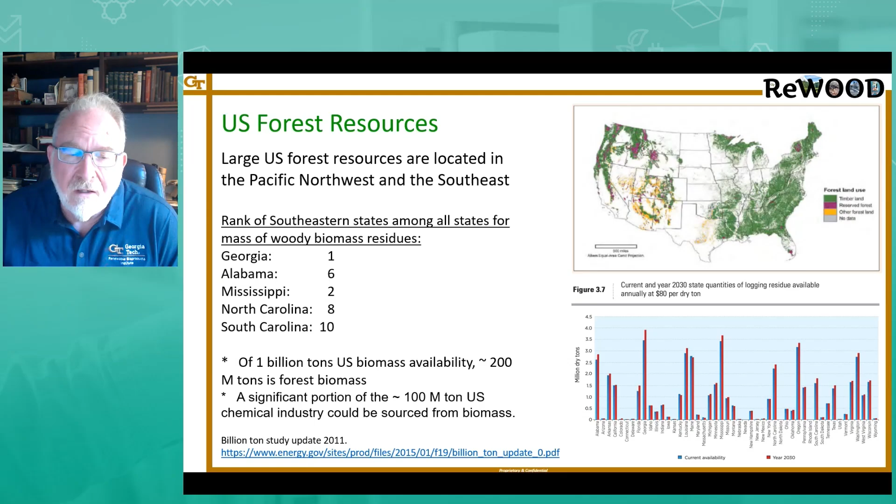The U.S. forest resources are rather enormous, particularly in the Pacific Northwest and the southeast of the United States. The rank among southeastern states is shown here, number one being Georgia, where I'm located, but also Alabama, Mississippi, North Carolina, and South Carolina. There's a lot of underutilization of forest land. About 50% of Georgia's forest goes into pulp, and the rest into plywood, MDF, and other construction products—there are a lot of sawmills in the southeast.

The DOE and USDA believe we have 1 billion tons of biomass available sustainably, and 200 million tons of that would be forest biomass. This would be a potential increase in our chemical industry if we could source materials from wood.

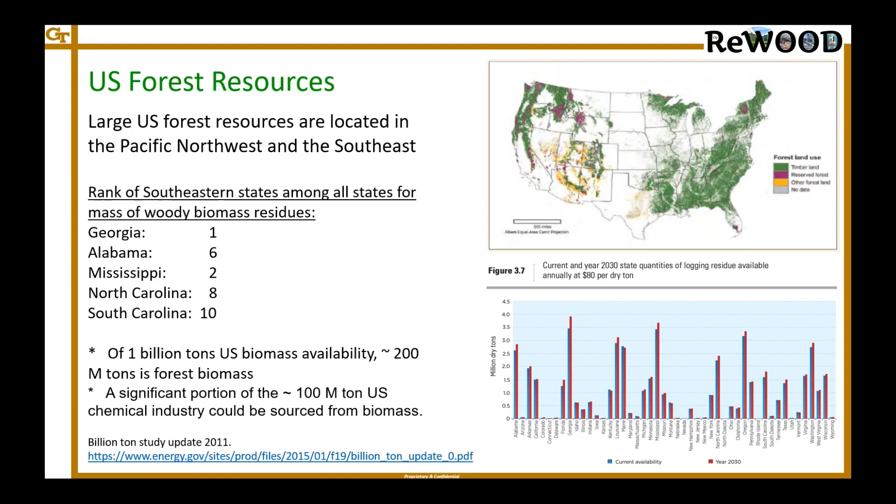This is just the value tree of what could be coming from lignin and the number of molecules you could potentially get from a tree, as an example of the various things that you could potentially obtain.